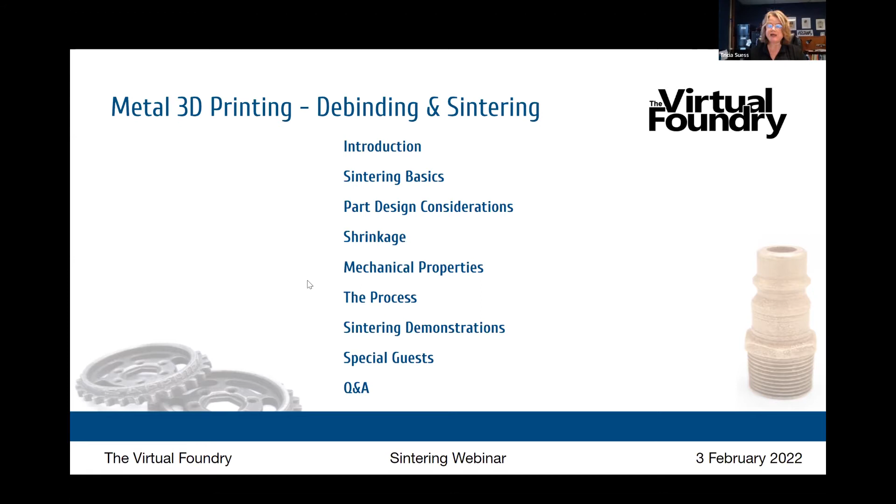So let's get right to it. As I said, I am Tricia, president of the Virtual Foundry. Presenting with me today is Brad Woods. He's our founder, CEO, the person who invented Filamet and the Filamet process. He handles everything science, I handle everything business. That partnership works great for both of us. And our special guests today are Matthew Drummond from the University of Guelph in Canada, and Mister Highball, a hobbyist who's been working with Filamet and posting lots of really fun videos on his YouTube channel about that. We'll hear from both of them later.

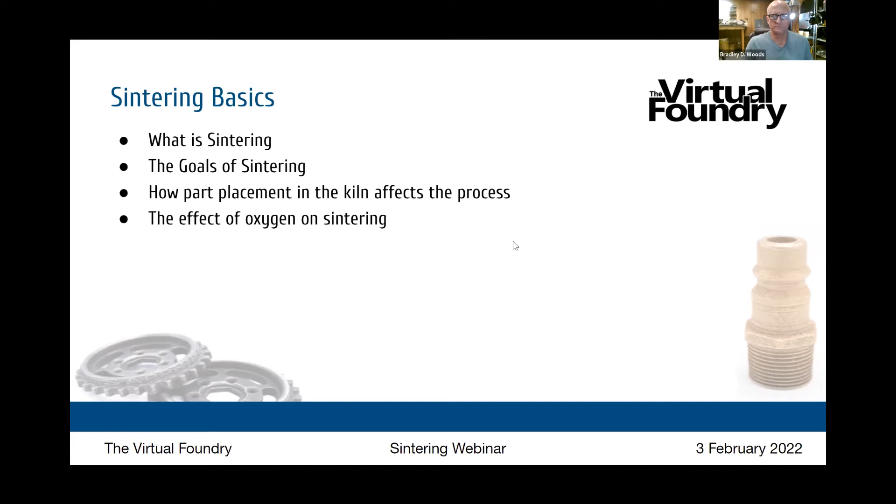So we've talked about one variable of the process, part placement in the kiln. Let's talk about some more—that's going to be the part design and how the part design itself affects the rest of the process. We're talking about wall thicknesses, infill, and overlapping layers.

Brad, the first question I want to ask is: is it okay for a part to have different thicknesses within the same part, like the piece in the upper leftmost position in this picture? My answer to every question is never yes or no. The more variation you have between very thick and very thin sections, the more difficult it is to get a successful outcome. The image on screen is a good example of optimizing additive manufacturing parts for the printing process itself. You could succeed with the part on the far left, but it would be much easier if you focus on a more optimized part. As more parts move to generative design to accommodate this new method of manufacturing, the process becomes even more simplified.

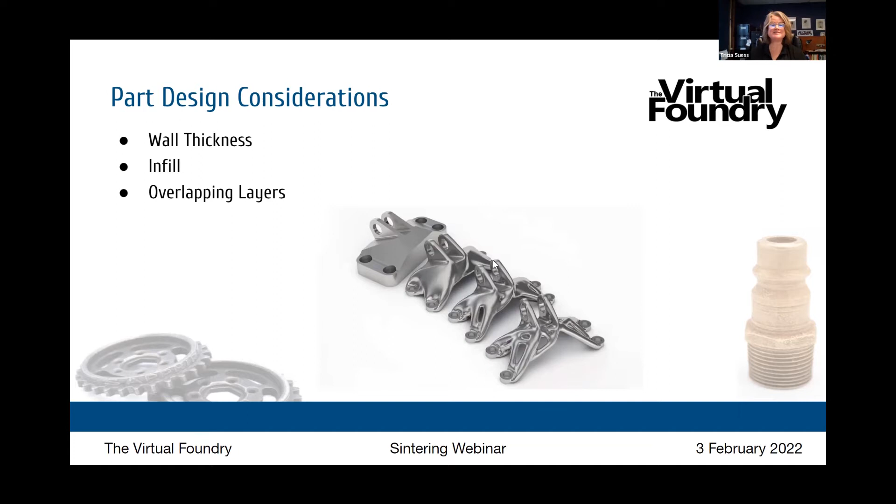I know the answer to a lot of questions in the engineering sphere is 'it depends,' and that applies here as well. So let's move on to a shrinkage discussion. I know this is on the minds of many people when they're figuring out how to slice or how to start with their computer model. So walk us through the association between shrinkage, density, and part shape change potential.

Right. So on our side of things, when we make this Filamet, it's our goal to get as much of the additive into it as we can. Let's stick with copper. In the example of copper Filamet, we want to get as much metal in there as possible and as little plastic as possible. In the end, the idea is to remove the plastic. So if you have too much plastic and too little copper, you'll wind up with voids and that kind of thing. Essentially, our recipe and material loadings are very, very specific—all the way down to the particle size, shape, and the blend of particle shapes. We've designed this so they all fit together very well.

So when you take, for example, a copper part and you debind it and remove that plastic, there's space where the plastic used to be. Something has to occupy that space or it just falls apart. What happens is during the debind phase, the part will shrink somewhere in the area of 2 to 3%. At that point, you have a part made up of particles that are all touching one another, with a little bit of binder remaining—just enough that you can handle it in the brown state.

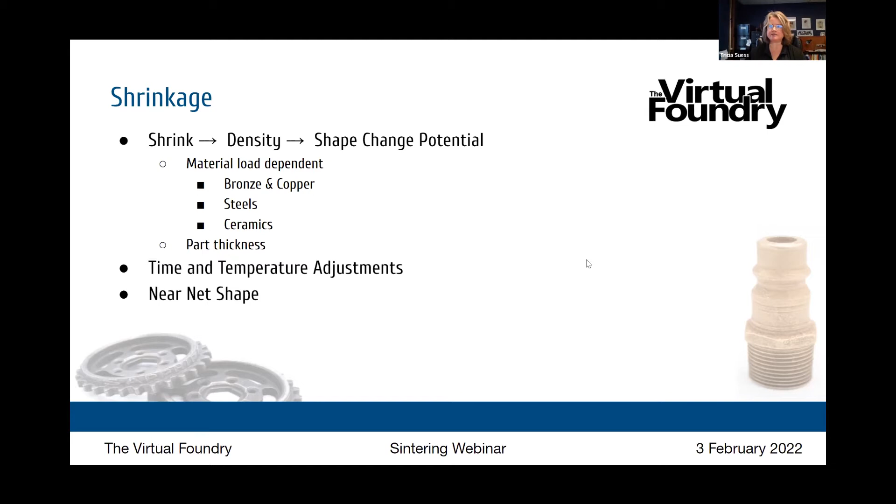So let's talk through mechanical properties. We know the final parts do have some porosity, as you just explained, so they're going to be a little bit different from cast or machined parts. Brad, talk us through that. How is that going to be different? Everyone's first question when they find our materials and our process is how does it compare to casting and casting and machining.

And it's not so simple to answer. The straight answer would be if I tried to make a block of metal that's machined and a 3D printed block of metal that's machined, the machined part would be stronger and more suitable. The better answer is that you wouldn't want to additively manufacture a simple block. There just isn't a good way, it doesn't make sense. So part of the additive manufacturing revolution we're coming into is getting people to think about part design a little bit differently.

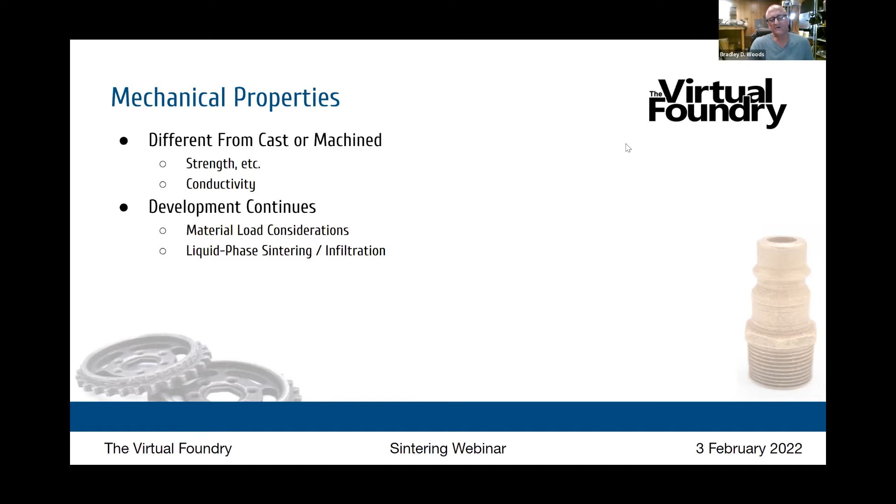And then when we get into the conductivity discussion, especially electrical conductivity, if we're thinking about copper, because those final parts are porous, they are going to have reduced electrical conductivity compared to a solid block of copper, for example. We have a student's thesis paper on our website that went through and did a careful analysis of the electrical conductivity of our copper, or bronze too—I think it's just copper.

Basically, what we found is that the electrical conductivity of the copper is dependent on two things: number one, purity, and number two, density. So a highly porous part, say it's only 75% metal, filled with holes sort of like a sponge, will conduct electricity at roughly 75% the rate of pure copper.

And we have two types of users. We have people that want conductivity, and we have people that want dielectricity—they want the best insulators you can possibly make. So the conductivity part of additive manufacturing is becoming a bigger and bigger topic, and people are getting further and further into it. It's becoming more and more complex, and it gets more and more interesting.

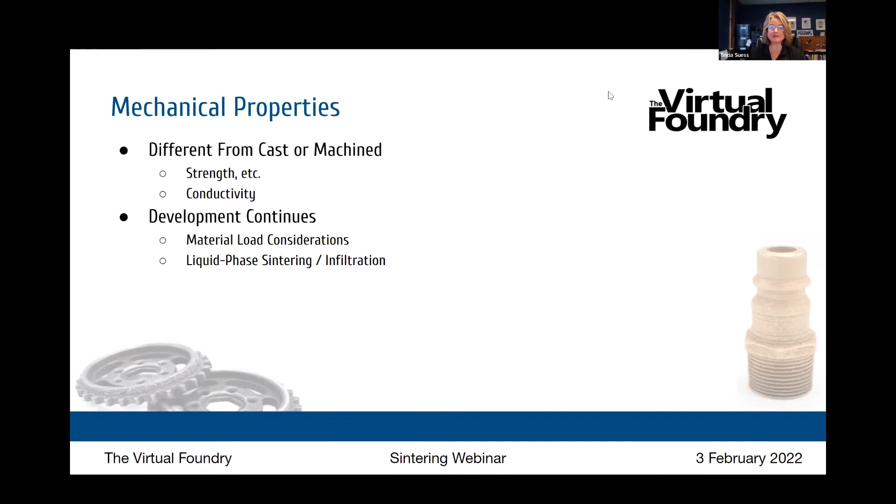All right, let's get on to the process. So when you're thinking about debinding and sintering Filamet, two things need to happen. First, the part shape is supported, and second, oxygen is prevented from reaching the part—I'm talking about metals in that case.

We solve the part shape problem by using a refractory ballast, and we solve the oxygen problem by using sintering carbon. Some people like to use a gas fill kiln; in that case, that takes the place of the sintering carbon. But in an open atmosphere kiln, sintering carbon will prevent that oxygen from reaching your part. The ballast is reusable. The sintering carbon is designed to get consumed, so it can be filtered and you can reuse the part that remains, but that is designed to be used up in the process. So that's a consumable item.

You're going to bury your part, and Brad will show us this in a minute. You're going to bury your part in that refractory ballast, making sure all of the part features are supported. You're going to tap that ballast in there, not pack it heavily, so that part still needs to be able to move and shift as it shrinks on itself. It's important that it's supported, but can also move.

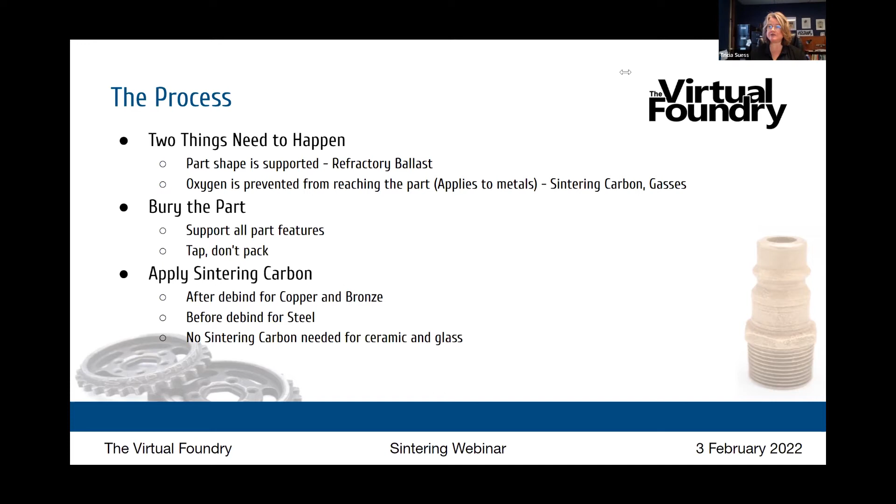Once all of that is loaded, you'll apply the sintering carbon to the top of that. When the sintering carbon is applied depends on the material you're working with. Sintering carbon is applied after the debind is completed for copper and bronze. Sintering carbon is applied at the very beginning of the process for steel. And then there's no need for that sintering carbon for ceramic and glass, since they are not so sensitive to oxygen.

So let's look at exactly what you need for each material. Copper and bronze, you're going to use an Al2O3 or a talc and sintering carbon. Steels, that ballast material is going to be the Sapphire 3D steel blend and sintering carbon for the oxygen. For ceramic and glass, you'll just need that ballast material, the Al2O3 or the talc.

So Brad, talk to us about the difference between the Al2O3 and the talc, both of which we offer as your sintering supplies. So the Al2O3 is large particles, about 100 mesh—sort of like beach sand, a little bit finer than beach sand. Its job is to support the part; we put it into the crucible and shake it in there, and it settles all around the part and keeps it in place. It does a few different jobs. It partially helps wick away the gases that are being removed during the debind process. And it's kind of interesting.

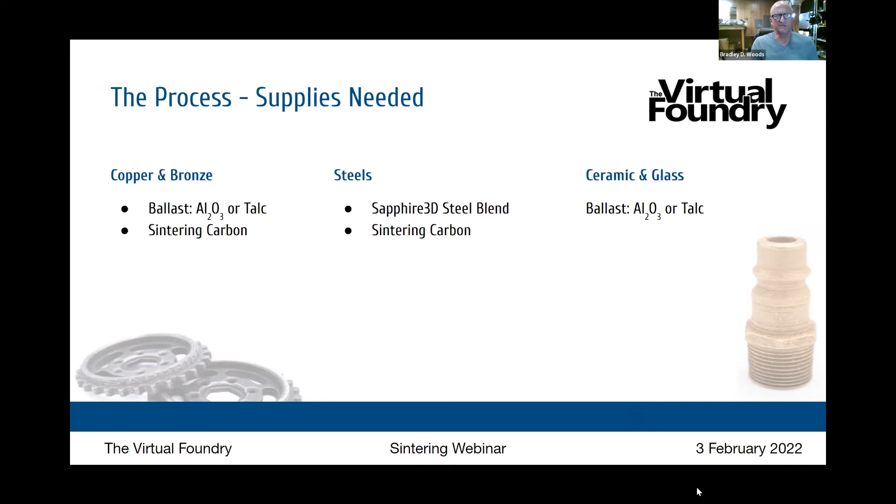After that, we now recommend that people do the sintering in a two-step process. They'll set up, bury the part in Al2O3, and debind it. As a secondary process, they'll take the brown part out of the Al2O3 ballast, and it's still strong enough to handle. It's a brown part—it would break if you dropped it, but it's plenty strong enough to handle, and you can actually manipulate it if you want, or sand on it.

Step two is to put it into the talc, and this is just plain old cosmetic talc—there's nothing special about it. The reason it works well is it's very powdery and fluffy, so it will yield as your part needs to change size as it shrinks and densifies. It moves out of the way easily, so it provides support where it's needed, but is able to get out of the way as the part needs to change its shape slightly during the densification part of the sintering process.

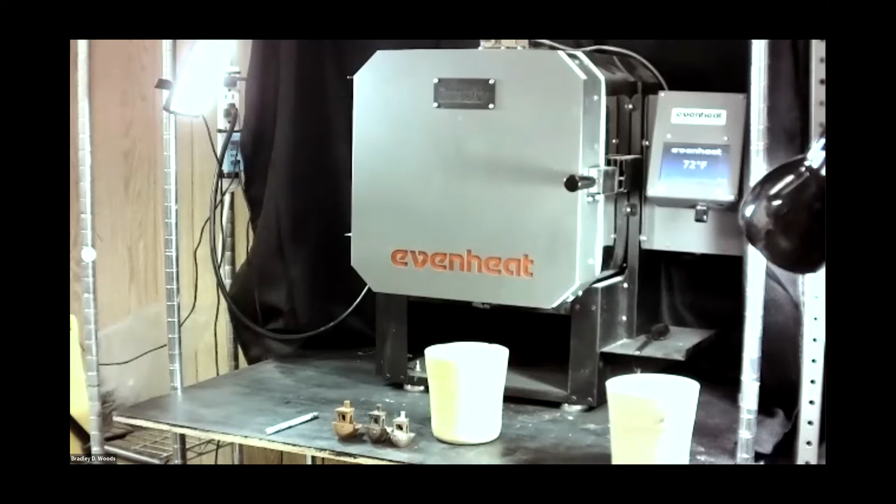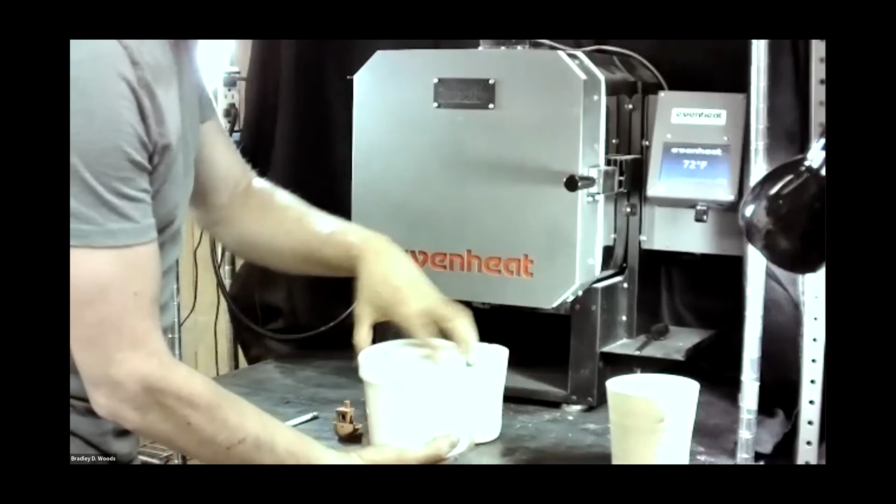Okay, so for step one, this is the Al2O3. All we do is take a crucible, fill it about halfway up, then set the green part on top of what you've already put in there. Add a little bit more. I like to shake it around so it settles in nice, making sure there's no air gaps left.

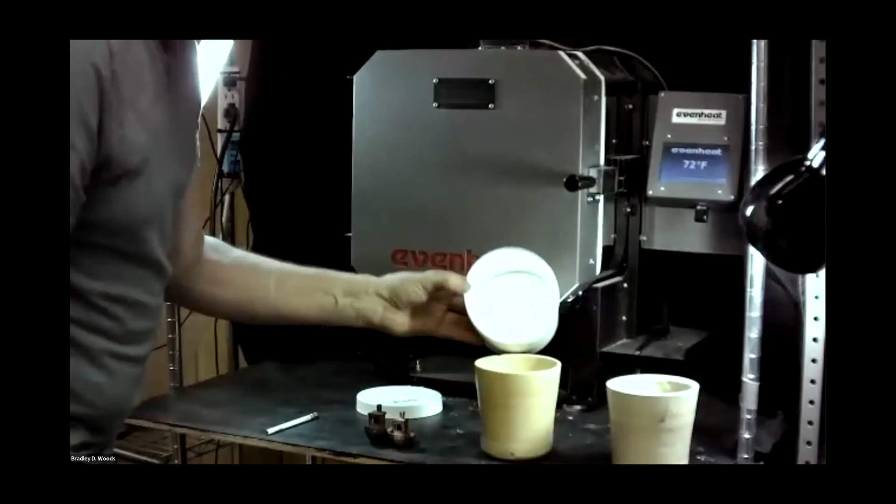Next step is to put it in the kiln and execute the debind program for copper in this case. We've greatly simplified the debind recipe. Essentially, you're just warming the temperature up to about 400 degrees as fast as you want, and then over however many hours it takes, raise it to the sintering temperature at a rate of 100 degrees Fahrenheit per hour. This is not a fast process, but it works really, really consistently, and you will get a successful result.

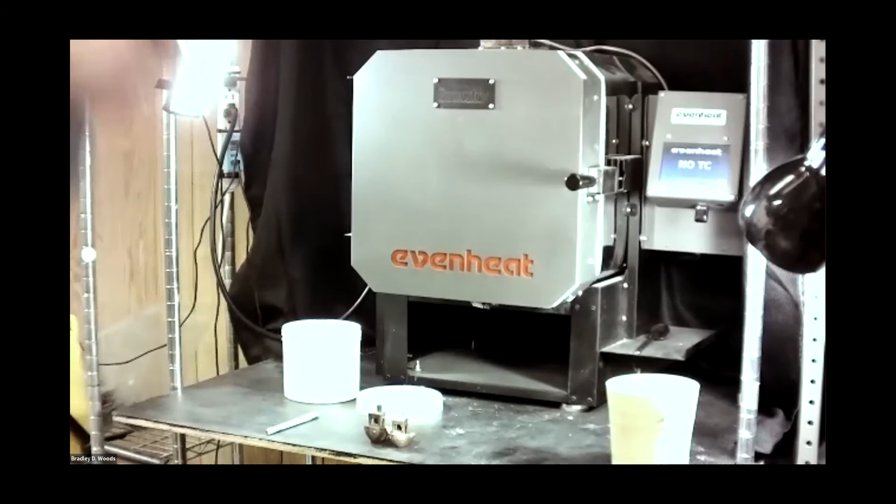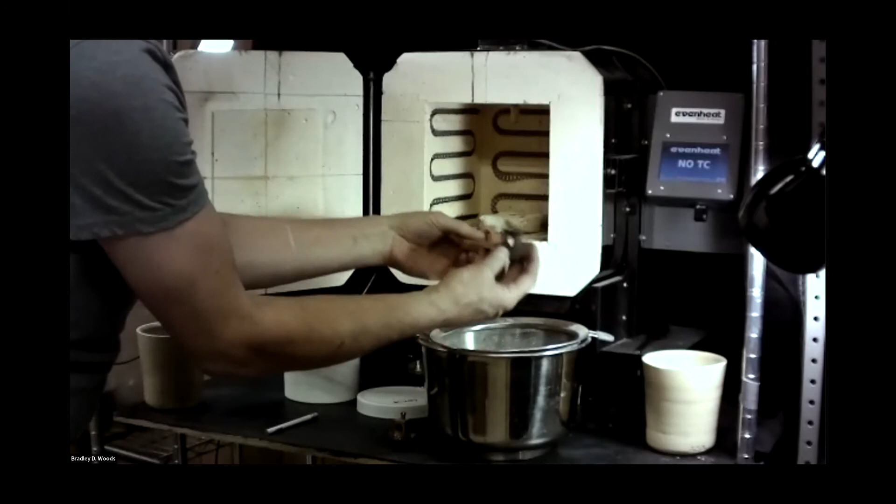So the next step - this is usually the next day. I run these overnight and then I'll pick up the next day. So the next day I will take just a household sieve, and you have a brown part. This is a brown part. You really can't see it on the camera. I'll post some pictures - I have some better photos with my big camera that we'll share somewhere so people can look at them later. But there's minimal shrinkage. Like I said, at this point there's maybe 3 to 5% shrinkage at most.

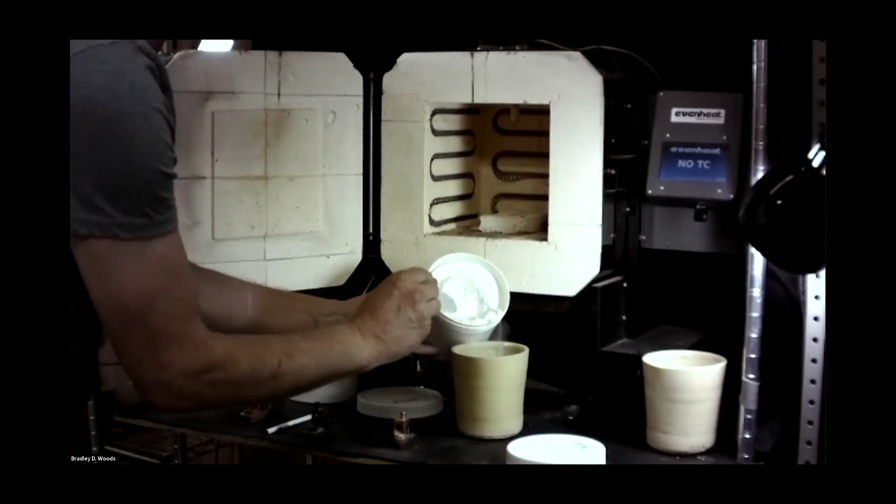Next step. Use the same crucible, and this is talc. What makes it interesting is that it's so fluffy - it's been used as body powder for hundreds of years. So that's the whole idea. It yields easily, so when I push on it, it'll move out of the way as it needs to.

So in this example, I'll fill this about 1.5 inches down from the top, settle it a little bit. I'll take my brown part and put it down into the talc. It pushes easily, the whole thing yields, move it around and make sure all the voids are filled. Put a little bit more on top of it.

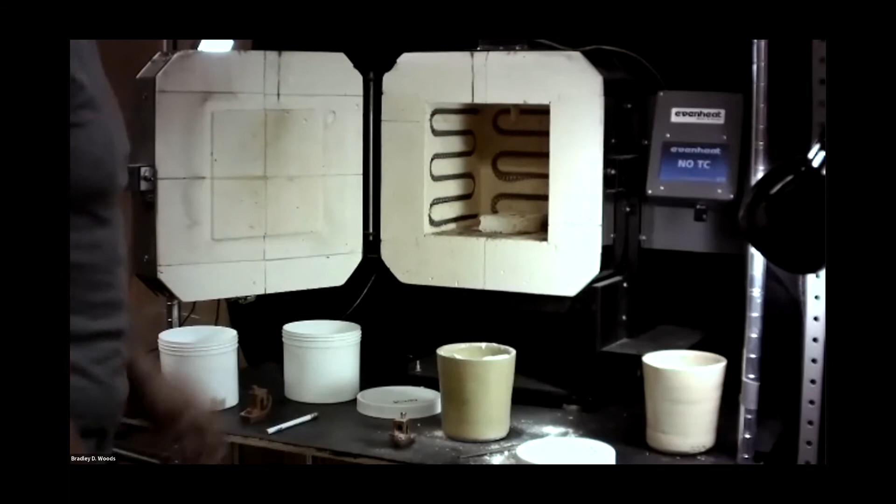Now, Brad, how fragile is that brown part? You're handling it in between the debind and the sinter process. My best answer is it's way stronger than you'd think. You can actually sand on it and clean up the part if you need to - if there's something you don't like about it, it's easily manipulable at that point. If you drop it, it'll break. I would say it's similar to ceramic greenware or clay, somewhere in there, where it's easy to handle but still fragile.

So on top of the talc, we'll get that settled in there and top it off with sintering carbon. Now, you really can't use too much sintering carbon. Whatever is left over at the end of the process, you can filter out and reuse again. And the best way to conserve this stuff is it will all be there except what has been exposed to oxygen and got consumed. So to maximize your efficiency on the carbon - there it is.

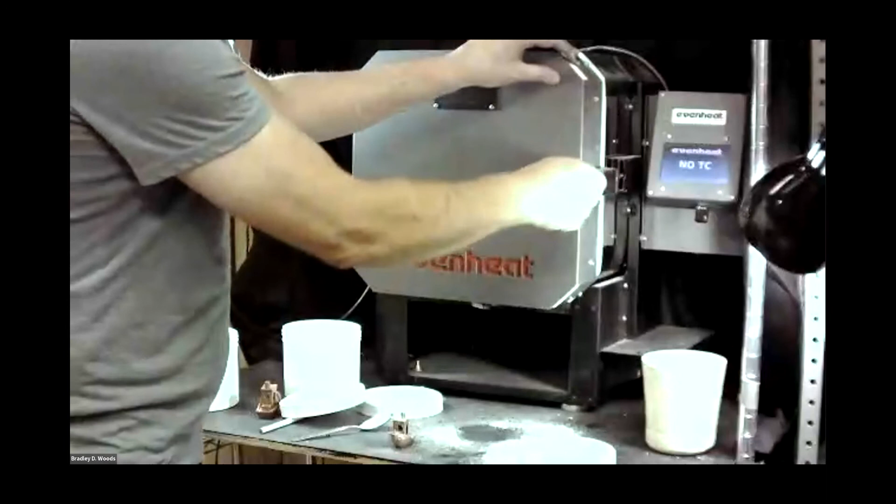Cover it. This is stainless steel foil they use for heat - they use it in heat treating a lot. If you cover it like that, you can actually use almost no carbon, and you can sift it back out at the end. So we put it back in the kiln for the sintering process, and this is similar. We ramp at a rate of 200 degrees per hour up to the sintering temperature. And that's it - there's no ramp and hold, none of that. We've simplified the process dramatically. Clean up a little bit here.

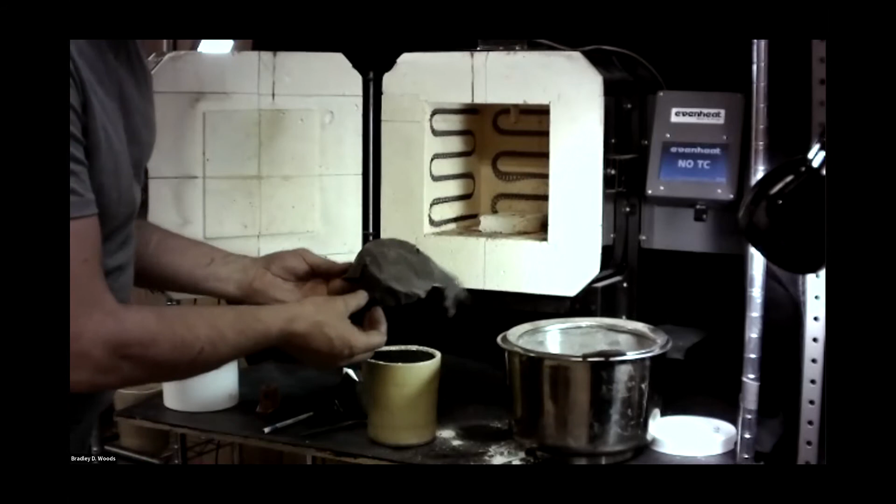So in the next step, this will be, again, the next day. So this is a multi-day process. We'll take it out, we'll take this off, and the stainless steel takes some abuse. It actually eats some of the oxygen, so it works as a getter, a sacrificial getter for you. So it'll look like this when you're done. And sometimes you can reuse these, often you can't. We'll make a new one.

We'll take the crucible out. In the same way, just dump it into a sieve so we can find our part and fish out your brown part, or your sintered part. And it'll pretty much look like this.

Brad, how do you know that your sintering carbon was used up? What does it look like at the end? If it's there, it wasn't used. If it's black, sometimes it'll get a little bit of yellowing to it, but pretty much as it's consumed, it becomes a gas. So it's just gone.

So this is our sintered final part. And the next step is cleaning it up a little bit. This is a part. We need a better picture, but this is with about 10 minutes of work with a wire brush on a Dremel tool. I'll switch to my other camera. You can see it a little bit better.

So this is what it looks like coming out. So let me show you that right now. So this is fresh out of the kiln, a freshly sintered part. The bottom of it, I have hit with the wire brush.

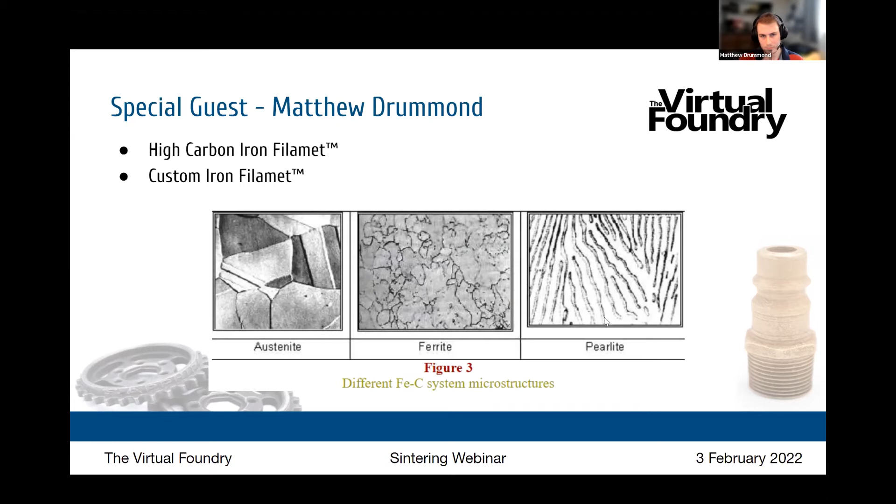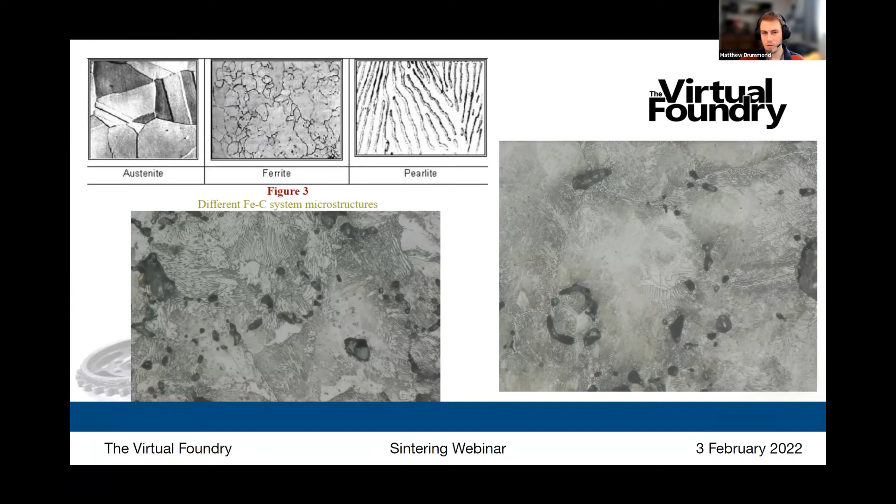But I had very big trouble keeping the carbon in the actual part. I'm using a very small crucible and a very small furnace right now, so the amount of space for these flow rate cubes isn't much, and the amount of carbon we can put on top is very limited. In the next slide, you'll see the crucible has all the carbon gone. As you can see on the left there, all the carbon is eaten away, and that's just the remnants after it's all been oxidized.

Something to combat that is to get a bigger crucible, put more sintering carbon in it, or we were even suggesting putting almost another crucible behind it of just carbon. That would allow the furnace and the oxygen in the furnace to essentially eat away at that carbon before it goes in and takes the carbon from your part. So we're trying to keep as much carbon as possible within the part.

The martensite structure is the strongest you can find in steels, but it takes a lot of carbon to get that microstructure. So keeping as much carbon as possible within your part is essential for a very high strength steel.

The next test we're doing at the lab, and my next test, is I'm going to print these flow rate cubes and increase the size ever so slightly. I'll make 5 or 10 or more, then run that standard debind and sintering program, to see at what size cube it will not fully sinter. That kind of shows how much heat is getting into your crucible, and at what point - how long you can sinter something, let it... how am I trying to explain this?

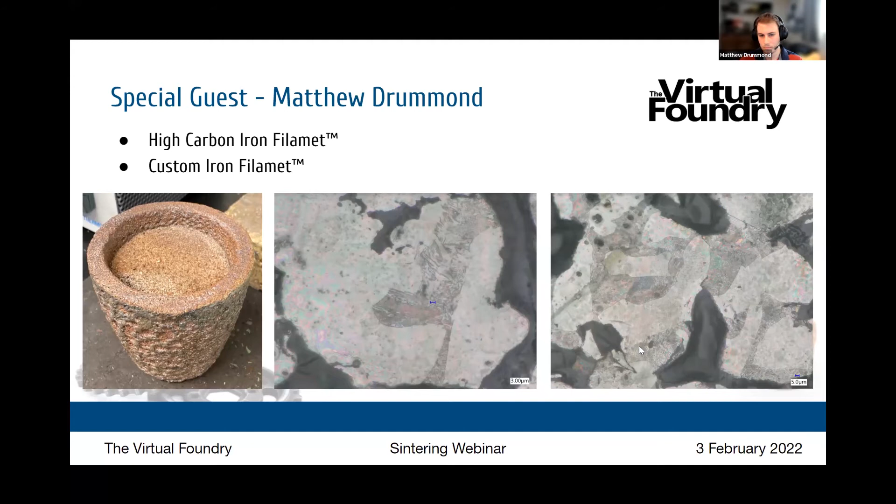These are kind of rusty now, but I polished a couple samples, and you'll even see one sample is smaller than the other - the sample closest to the side that was really burnt, really sintered underneath the coil, that's actually the smaller part. So that was something I noticed: the parts closer to the coil and closer to that hotter side did shrink more. I'm not sure if I've got another slide there or not, Tricia.

Yeah, no, those are all the photos.

Okay, so yeah, that's pretty much it for me. I'm doing more of the research side. It's been very interesting - we have a lot of problems and a lot of fun things to figure out. But the custom filament has been very nice, and the actual high carbon has been very nice to print with. The results have been very good, and I think it's about getting a process to optimize it.

I know our next steps are heat treatment. Once we get a good solid part, we're going to put it back in the furnace, get up to 400 to 800, and temper it in oil or temper it in water, and see what kind of microstructure we can get.

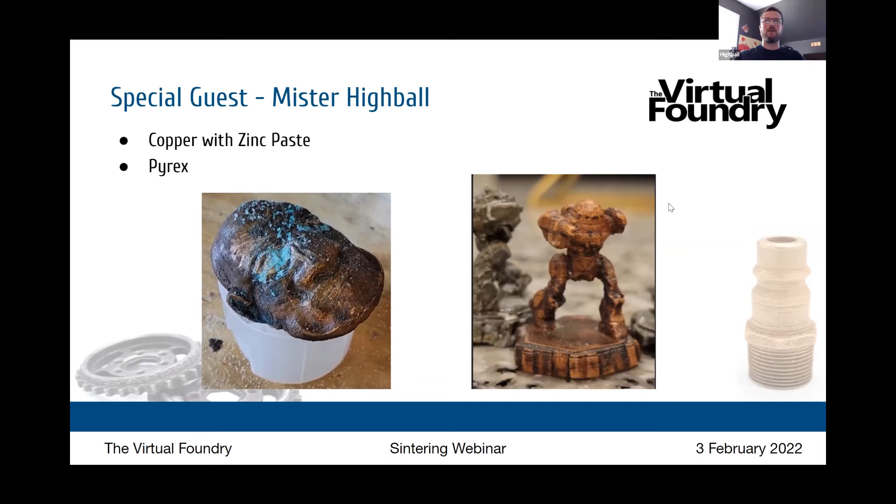So the few things I have listed here, I've done some large parts and some small parts. The one on the left is a recent mask design which I designed, printed, and then sintered, experimenting with different patina techniques, including heat treating in peanut oil and trying a green patina with acid and salt. On the right, I've done small pieces, including minis for tabletop games, and the difference is pretty drastic for the detail I was able to achieve on just an FDM printer. After sintering, there's really no deformities, and you get a really nice patina.

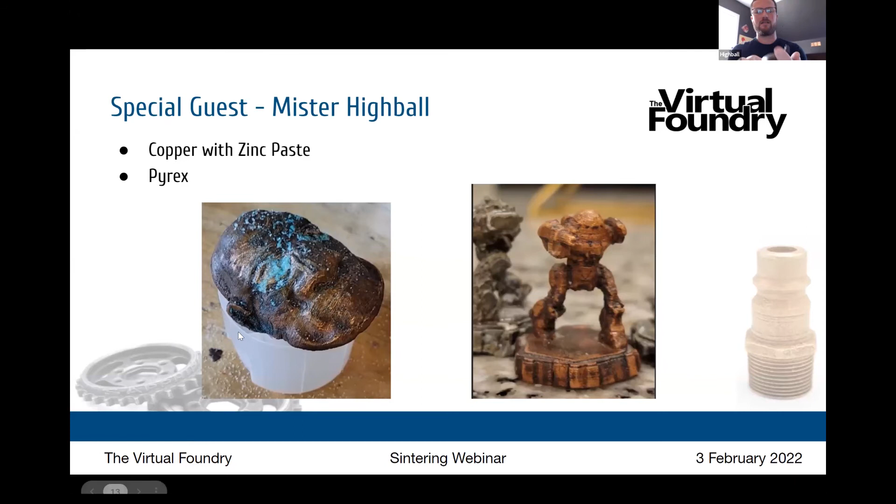I've also done Pyrex, though I don't have pictures of that. I really like the Pyrex material because of how easy it is to get a really good looking ceramic piece at the end. I'm experimenting, it's in the works, with potential glazes that can be applied as well. I'm not an artist by trade, so what I consider good looking may not be - it's in the eye of the beholder.

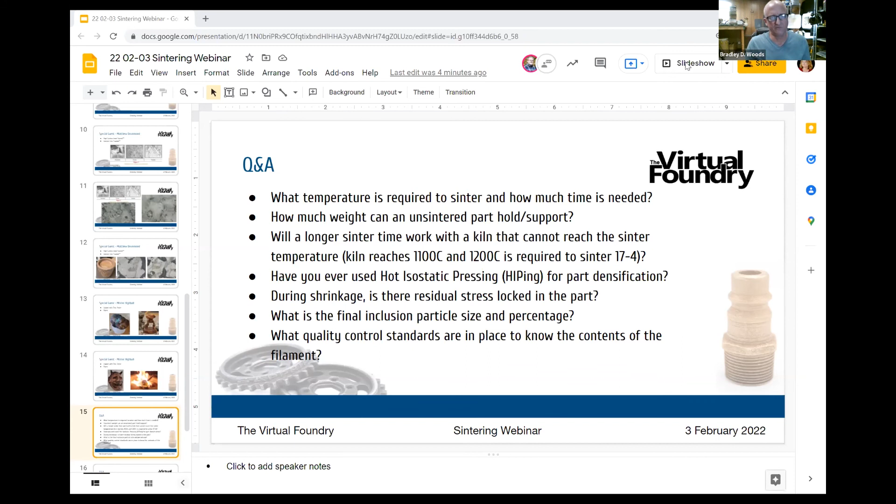Beyond that, we supply our powder materials from one of two places: either from the auto industry, which has a huge investment in powder metallurgy and has been doing this for 20 years—so it's an excellent source of high quality powder metal products—or some of the other materials we start with were originally destined for a powder bed fusion type environment with laser sintering or laser melting, so those are also incredibly high quality materials.

Beyond that, on the manufacturing side, for size and percentage we mechanically measure it continuously. On the extrusion line, we have an automated laser micrometer that makes sure nothing is out of spec. On the percentage side, we just do spot checks throughout the day and throughout the run.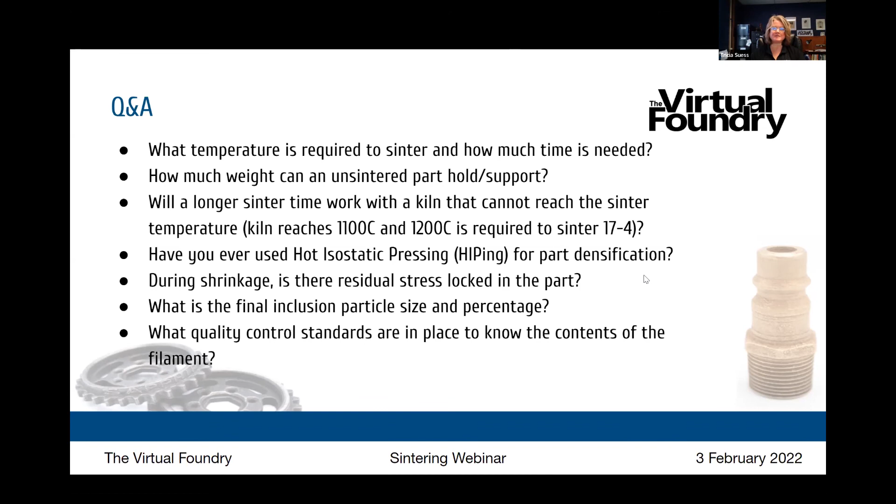If you follow that exact same process using the same equipment, you'll get the same result, right? But our process allows you to use any equipment—it offers flexibility in every part of the process. So the data we provide will be a benchmark, a guide. It won't be a guarantee of what happens every time because of that flexibility. This is going through a formal metals lab at the university.

So we've very carefully recorded how we printed the parts, because we know how it's printed can have an impact on its final strength. We've documented that and will ship it over to UW-Madison, and they're going to do the full line of metallurgical tests on it, to the ASTM standards. This will be interesting, and it won't be the final answer because there are so many variables. It will only answer the question for parts printed in the way we printed and processed them, but it will still be useful information. That full process will be provided with that data as well.

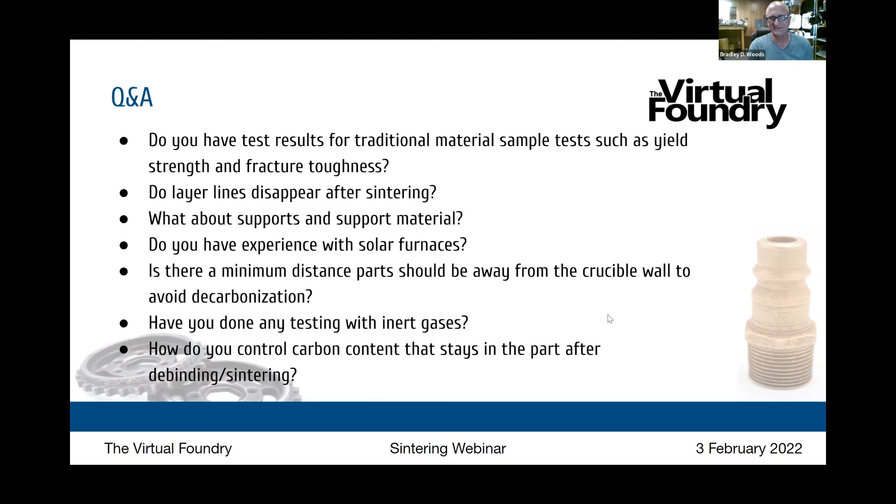We actually have a functioning prototype right now, and the main problem we've had with it is the filament gets brittle. It doesn't do it on day one, but it can take a few days to get that way. I know what's happening—the thermopolymers are depolymerizing, breaking down—but I don't know why it does it with brass and nothing else. So yes, we will do brass no matter what it takes. I chuckled a little at the question because around here, brass has become personal. So we're definitely on a quest to get that, and you'll hear about it once we're able to get it out of the manufacturing machines.

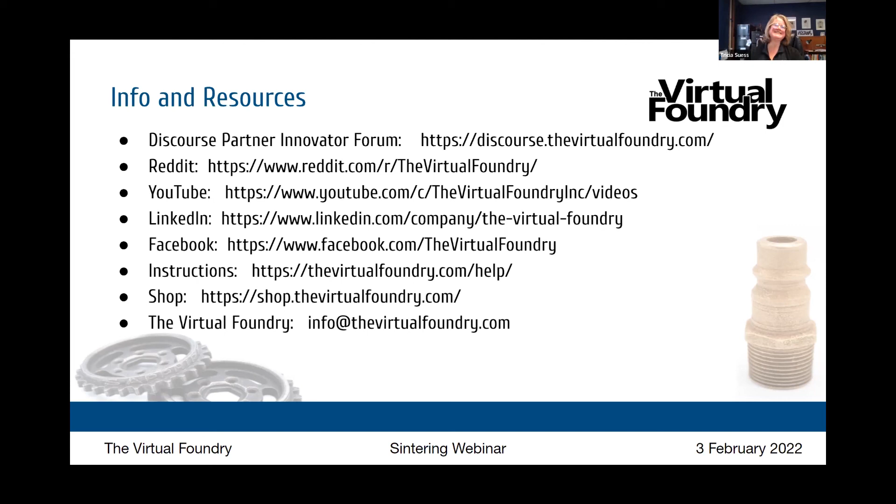It was a pleasure, and Brad, I would be remiss if I did not ask you one more very important question before we wrapped up. Let's have it. What kind of fish do penguins catch at night? I don't know. Starfish. Nice. A groaner. Thank you, everyone. We will see you next time. Thanks.

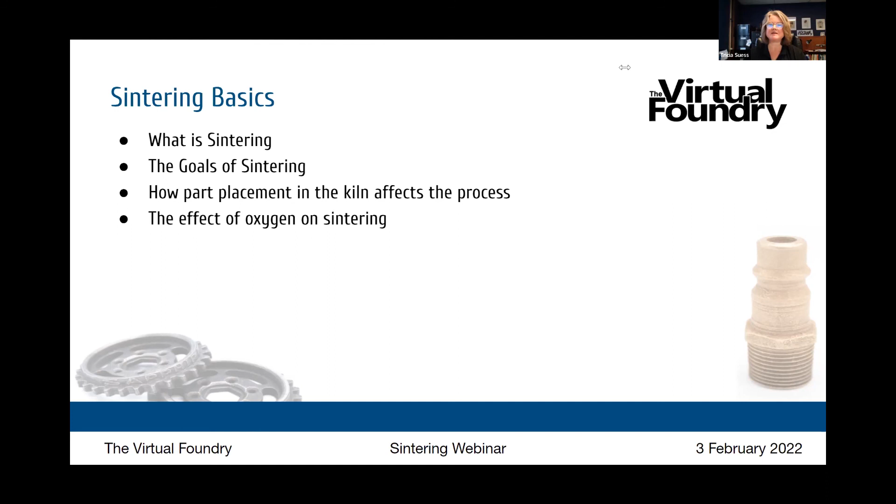You're going to need to enable my video. Okay. Yes, there you are. Am I on? I can't see myself, so. Okay, we're going to get to some questions. I am going to, oh, that's not what I meant. Just a moment. Okay, we're going to display these questions here.